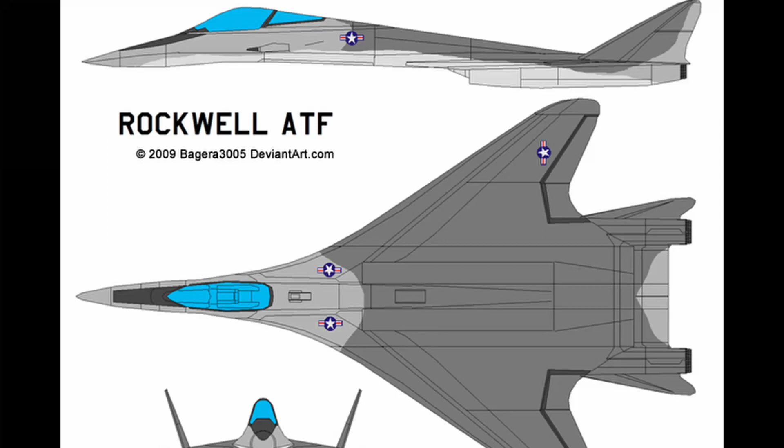A while ago, I decided I really wanted to build the Rockwell ATF, which was a concept aircraft discussed by Dan Raymer in his book, Living in the Future, in which he talks about his work as a conceptual aircraft designer working on various manned and unmanned vehicle projects for the military. The ATF, or Advanced Tactical Fighter Program, was developed by the Air Force to develop a next-generation air superiority fighter, one that would basically be a successor to the F-15.

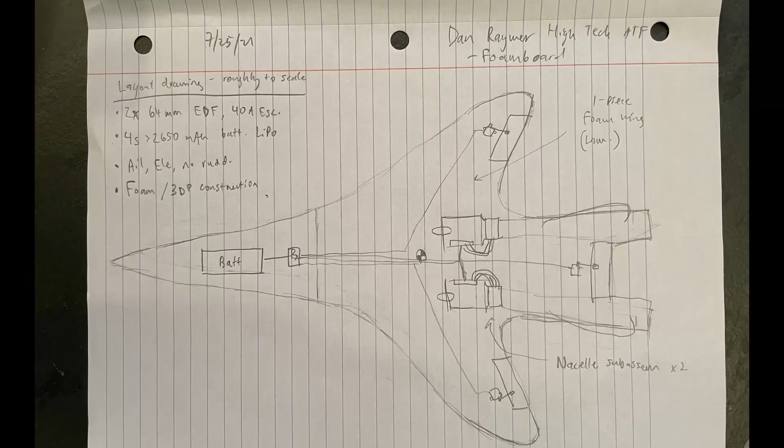Rockwell's preliminary concept, designed by Dan Raymer, is described as sort of a supersonic F-117, but I sort of see it as a cross between a Su-27 and an F-14. To my knowledge, this airplane never left the drawing board, and it exists only in drawings and 3D renders, so I decided to make it RC. I began sizing my RC model for a twin 64mm EDF setup because I was familiar and had some experience with these little motors.

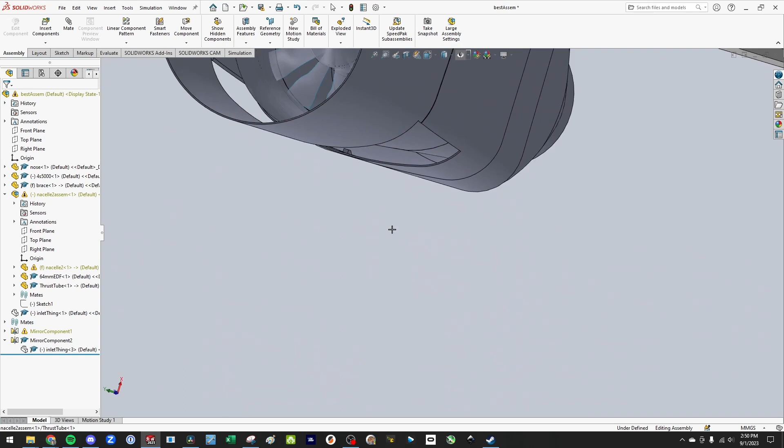So this is a little bit about the modeling process that I used in SolidWorks to make this airplane. The reason I wanted to model this airplane is because I knew I wanted to 3D print certain components of this airplane, such as the nose and the nacelle. I later realized that trying to 3D print an entire nose would have kind of been a pain, so I ended up only printing the nacelle. So that was one reason, and the other reason is I wanted to see how everything would look before I started making it, and it's really easy to do that on a computer.

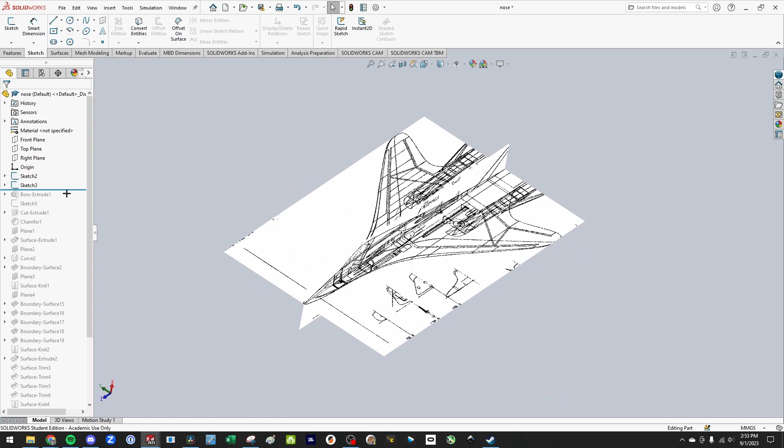So I started by importing the top view and the side view of the actual aircraft drawings, and those were kind of the baseline sketches where I could base everything off of. Next, I decided to model a wing. I knew I wanted to make this out of foam board, so modeling it was pretty easy. I just sketched the contour and made a very simple extrusion to represent the flat foam board wing that I would put on this plane.

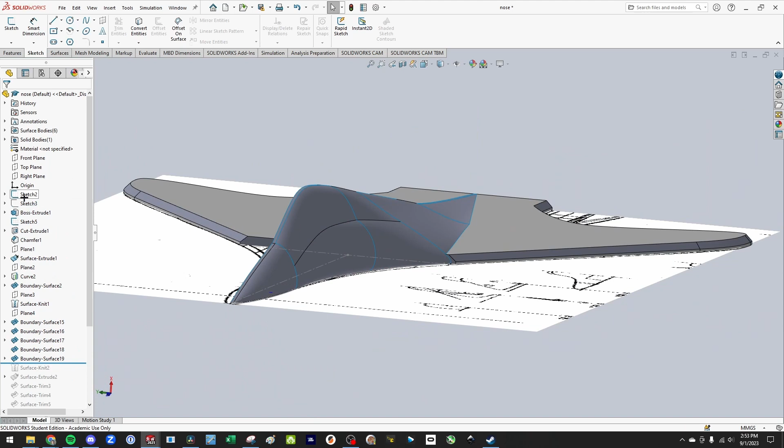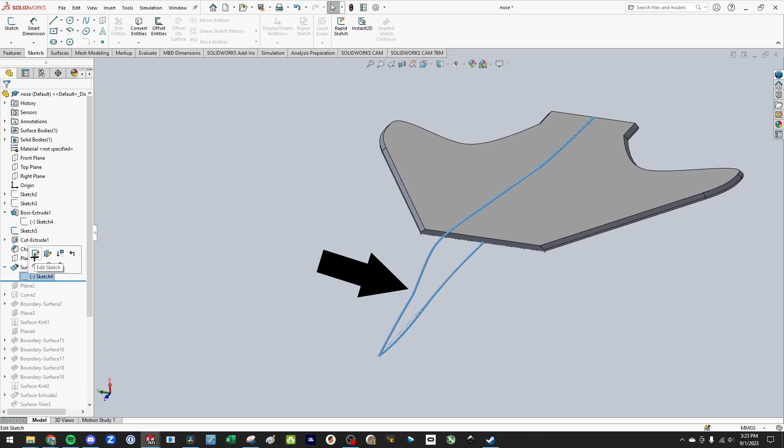After that was the more time-consuming part, which was the nose and the rest of the fuselage. I started by modeling everything using boundary surfaces, which worked fairly well until I realized I needed to mirror it. SolidWorks really doesn't like mirroring boundary surfaces when they're not perfectly perpendicular to the plane that they're being mirrored to. So what I ended up doing is making a very thin boundary surface, and that provided a clean cut that I could mirror across. You can see this in the final model, and that helped me make this entire surface into a solid a little more easily.

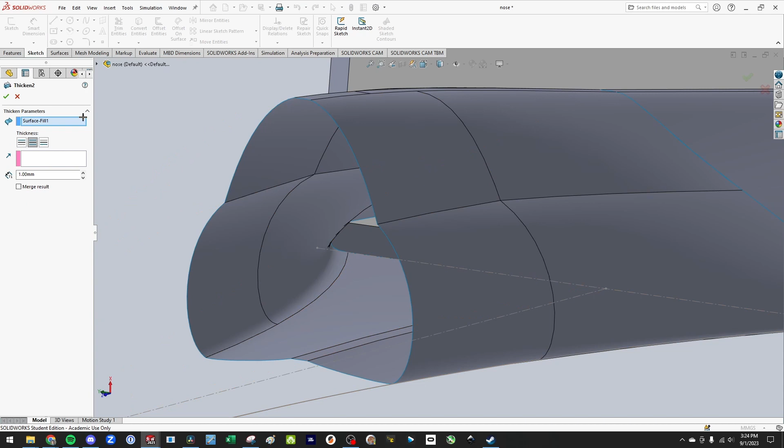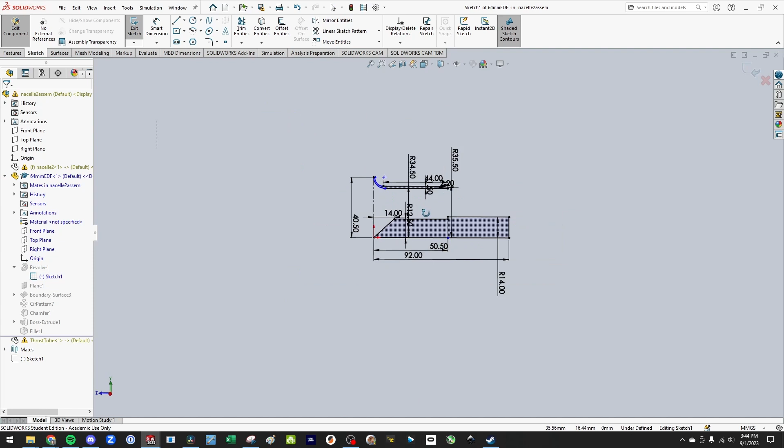In the end, I was left with a nose that looked fairly realistic and ready to 3D print, so I initially thought, until I realized printing all the pieces would have been a huge pain in the butt, so I just ended up making it out of foam board instead, which is what you're about to see. Oh, but before we do that, I almost forgot to talk about the nacelles. This airplane has two engines, and each engine has its own little housing or nacelle, mounted on the bottom of the airplane. First I modeled the little 64mm EDF units that I have, and once I had those in CAD, I could design the enclosure around it so it wouldn't take up any extra space.

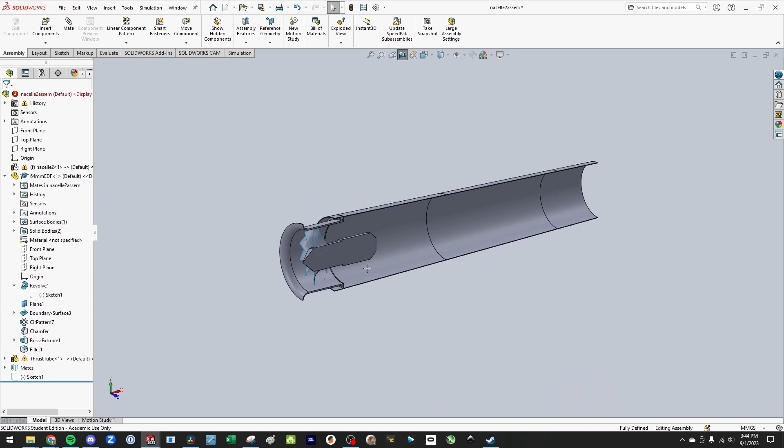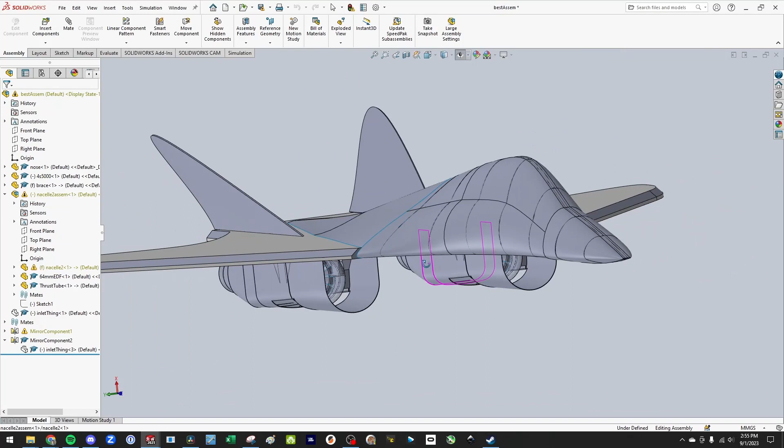These nacelles are basically two parts. There's a little thrust tube inside, which constricts the flow out of the EDFs to make the flow a little bit faster, and that makes the entire airplane a little more efficient. The other part is just the exterior housing, which is meant to look nice and fairly representative of the CAD models and the drawings of this actual airplane that I had found online. Okay, that's enough CAD. At the end of the day, the CAD was really only useful to get an overall picture of how this plane was going to come together, and to generate the files for the nacelles, which I then 3D printed, and now it's on the actual build of the airplane.

I began with the wing, freehanding the contour and cutting it out of foam. I made 3 of the same pattern and sandwiched them together with Gorilla Glue and left it to cure. For the canopy and nose section, I referenced a side view of the airplane, cut out the 2D profile, and glued it in place. Here's me thinking about where all the components are going to end up, for a preliminary center of gravity assessment. I then made the bulkheads, which define the frontal cross sections, and hot glued in foam board skins as the last step. The 3D printed nacelle components were next.

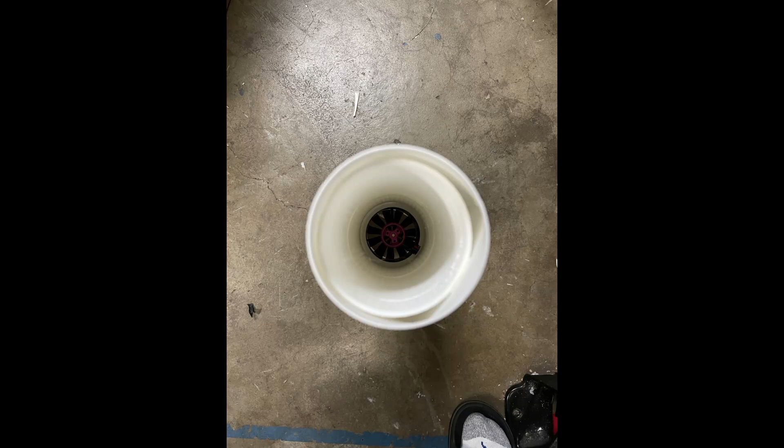These were all printed out of PLA and CA glued together, which made the parts quite rigid. It was then time for a quick electronics test to verify that everything worked, which it did, and after making an impromptu battery hatch, it was time for a first flight. Okay, here goes nothing.